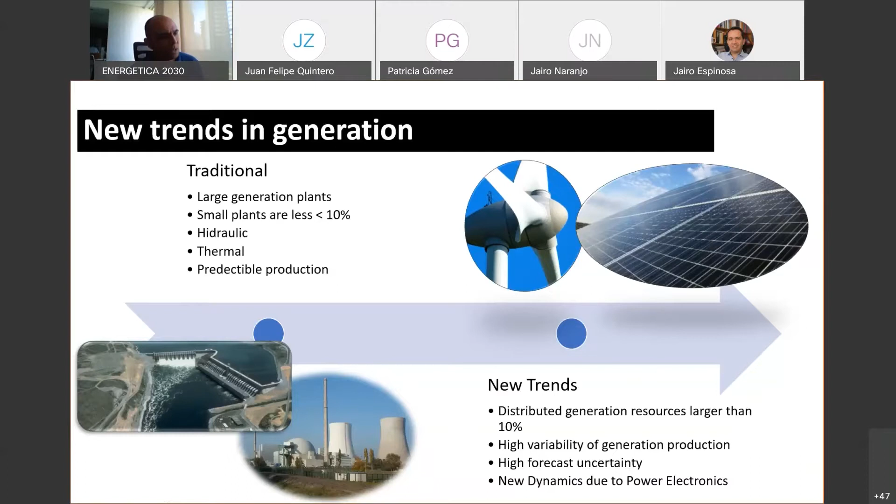So we have high variability in generation production. Now the distributed generation is becoming larger and larger. So we have a lot of distributed resources in the power system. So it makes new dynamics that we have to take care of. There is a really high forecast uncertainty. So it's really difficult to forecast long term the generation that we will have. So these challenges make us change a lot.

So we are focusing on Colombia right now, and Colombia is a power system that has an energy matrix that is really hydraulic. More than 60% is hydraulic, and then it's thermal. But now we're becoming really fast to get new types of generation, especially solar and eolic. And there are some projects, and the idea is to include the projects in 2, 3, 4 or 5 years. We'll have up to 7,000 megawatts. So it's more like 30% of our current capacity.

And all the technology is going to be placed mainly in the north part of Colombia. And it takes new ways to analyze what the power system is right now. So there are some other countries in Europe and the United States that have faced this challenge before. However, we are trying to be in the same way, and we are developing with these partners a lot of the new technology that we need to control this type of systems.

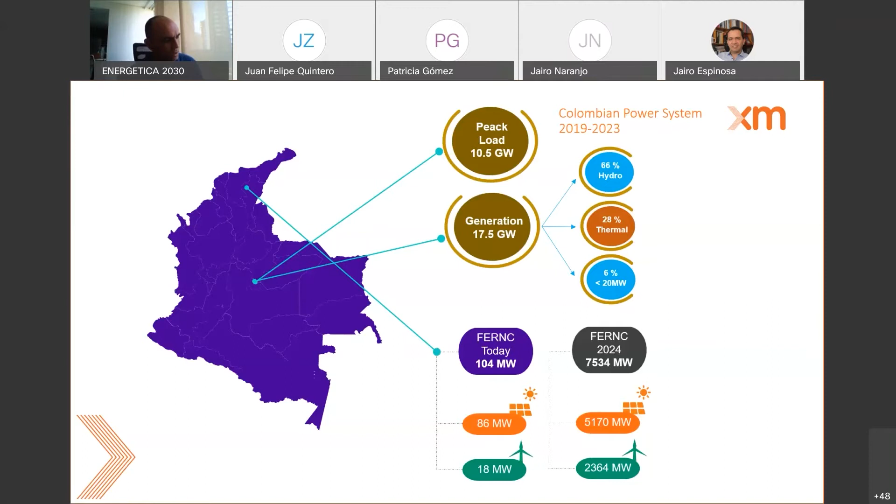Another thing that we are facing right now is that we have a lot of auto generation. So in Colombia, auto generation is increasing, and around the world, especially in countries like the United States and California, it's also mandatory for new houses to have auto generation. So it's becoming more and more popular, and it makes a new challenge in the operation of the power system.

So the other thing is that the electrification of transportation is becoming more popular. For example, Colombia is one of the countries that has more electric cars. In Latin America it is a country that is increasing the production of...

Sorry, there is someone with the microphone. Okay.

So the sales in Colombia are getting bigger. We are facing new challenges in the infrastructure and also in the control of this technology, because it will be really hard to control the charging and try to understand what is happening with the demand. So we have more active demand in our power system and it is creating new challenges in the control room.

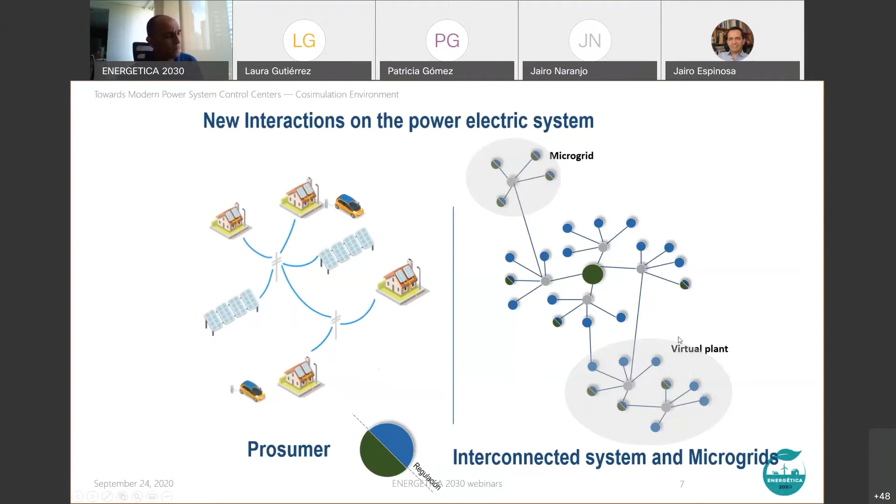We can have new actors like a microgrid, a simple microgrid that has several prosumers, but also something that we are calling a virtual plant. It's common that you aggregate several microgrids and then you try to dispatch these microgrids centralized, or probably they can be separated also. And then we have our traditional power system. So they are facing new things in this part. For example, I want to show you an example of what is happening that we have to take care of when we are forecasting our demand and our generation production.

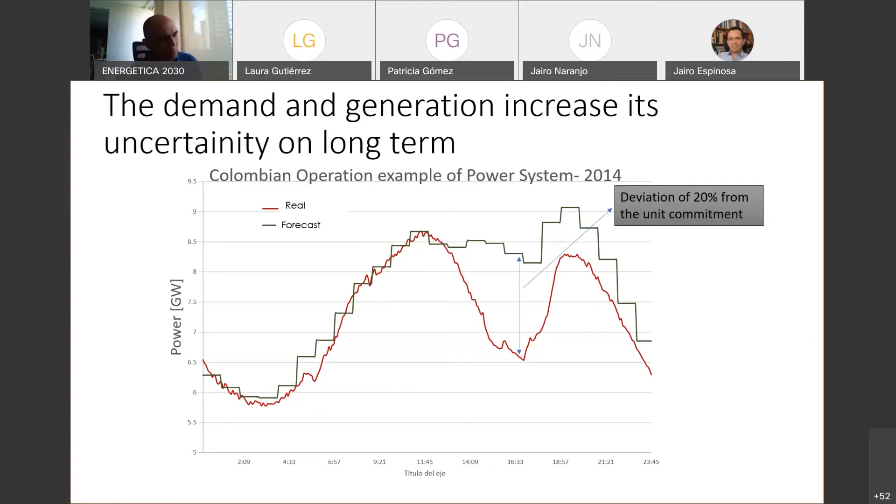For example, in 2014, our independent system operator forecast the demand of the day. It was a particular day, and the demand just had a different behavior that day. It was really interesting because this behavior was due to social activities. This social activity in Colombia was because we were in the World Cup, facing the match Colombia versus Uruguay, and the demand went down up to 20%.

So these types of things make us think that we have to take care about different conditions, not only the electric variables, but also other conditions. For example, we have to take more concern about the traffic, because now we are having a lot of demand coming from electric cars. We need to face the new social conditions and disease. Today we have COVID, and it brings new things to forecast the demand. So it's something that we have to take care of. We have to combine all these things to make a control system more reliable and efficient.

So what is happening right now is that our power system is becoming more nervous. Our balance between demand and generation is changing really fast. We are facing really fast movements that we have to take care of, and our control system and our supervision system must be prepared for these conditions. We have to continuously see what we can do.

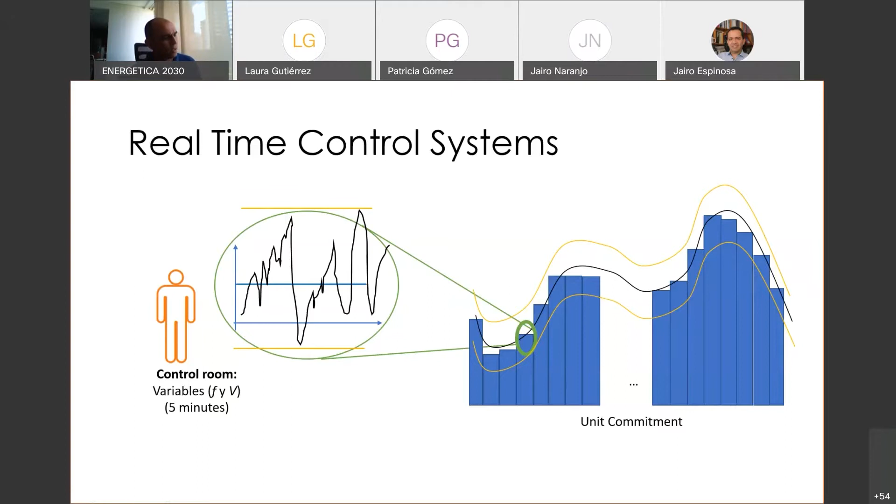So in this case, we start with our power systems. Since it's a critical one, we need more reliability, strength, redundancy, response and restoration, and all these we can group in a term called resilience. So our system has to have more of this feature, and that's why we are trying to study this part.

So Energetica has one of these projects called Power System Supervision, Operation, Protection, considering the high penetration of renewable energies. We want to develop technology that makes us prepared for this challenge that is coming really fast. So every day we are trying to become more active in this.

Involved in this particular project are Universidad Nacional with our real-time lab, XM, the independent system operator, with its lab of innovation and co-simulation called LinnoX. There is also Internexa, a communication company that also has a cloud service that we are trying to use, and Universidad Pontificia Bolivariana with its power system group.

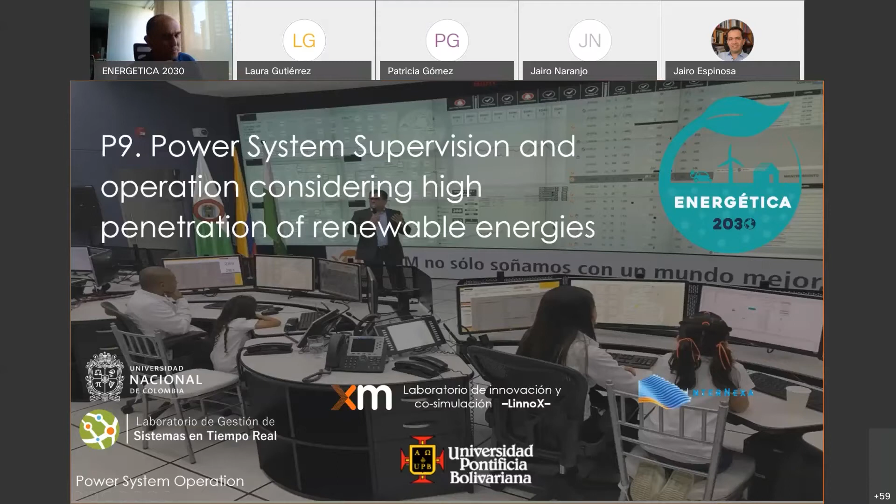This project within Energetica is also supported by some international allies. If you have been in the previous webinars, some of them have been participating here, especially the University of Aachen and the Institute of Jülich. We also have interaction with the Catholic University of Leuven, TU Delft, and the Technical University of Eindhoven. We have in this project more or less 30 to 40 researchers, and we have divided this into several objectives. I'm gonna show you a little bit.

Sorry, this is in Spanish, but we have an objective related with the forecast of generation and demand for real-time applications. We have the unit commitment and real-time dispatch of our plants. Some objectives are related with supervision, how we can supervise and control this system with these new dynamics, and some protection schemes that are needed. All these objectives are within a framework of a co-simulation lab and a strategy to make new ways to supervise the power systems.

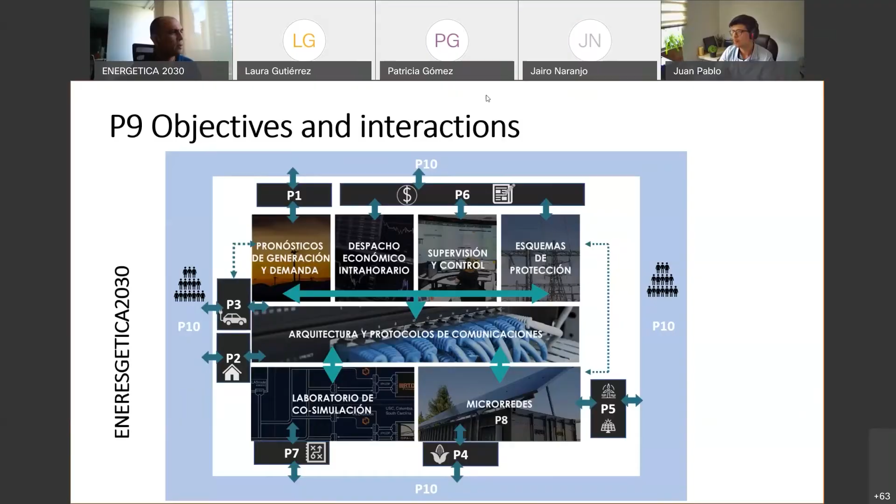One second. Set this up. So I guess you can see now on the screen. That's correct? Yes, Juan Pablo, you can. Yes. All right. That's perfect.

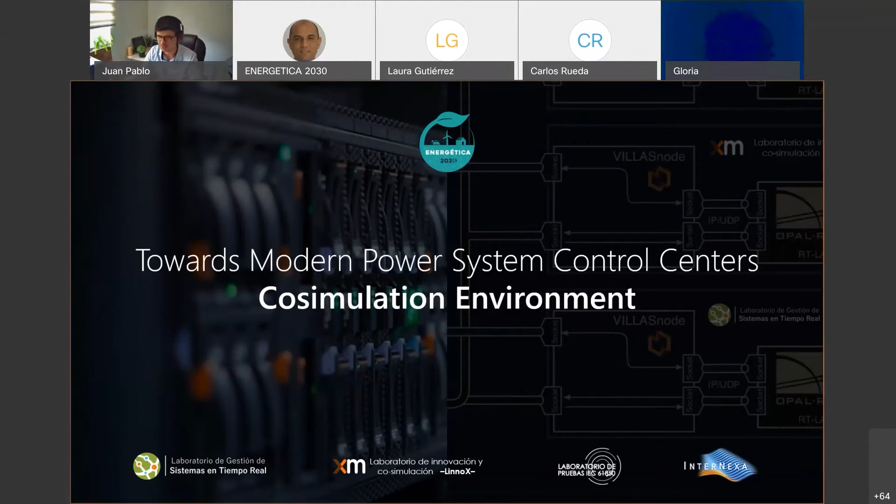Well, as I was saying, my name is Juan Pablo Noreña, and I want to talk about how co-simulation environments, and more specifically, our co-simulation environment here in Energetica 2030, is helping us to create a roadmap towards modern power system control centers. So let's say that modern energy systems are expected to be multimodal, as Professor Ernesto said, and incorporate a diversified matrix of sources to achieve the maximum usage of every form of green energy available.

That's the main goal. It's a vision that the distributed nature of these new resources and the high penetration of inverter-based generation require faster, more reactive control and protection of our systems. Other important aspects are the inclusion of storage capacity as utility scale batteries and vehicle-to-grid approaches that introduce very interesting dynamics to the system.

The demand response, the participation of load in energy management through microgrids, virtual power plants, and other kinds of aggregation of these prosumers. Also, we have an increasing market competition-driven behavior in our system that introduces other dynamics involving very human dynamics around markets in energy systems. So because of these characteristics, modern energy systems can be classified as complex. And naturally, concerns about emerging behaviors might arise.

So the monitoring and control of modern energy systems is expected to be characterized by a distribution of these functionalities, these functions that must ensure the correct orchestration of the system. So to ensure this optimal coordination, we will need a significant use of communication media and computational capacity. This is due to the increasing number of controllable devices that we will have in our system.

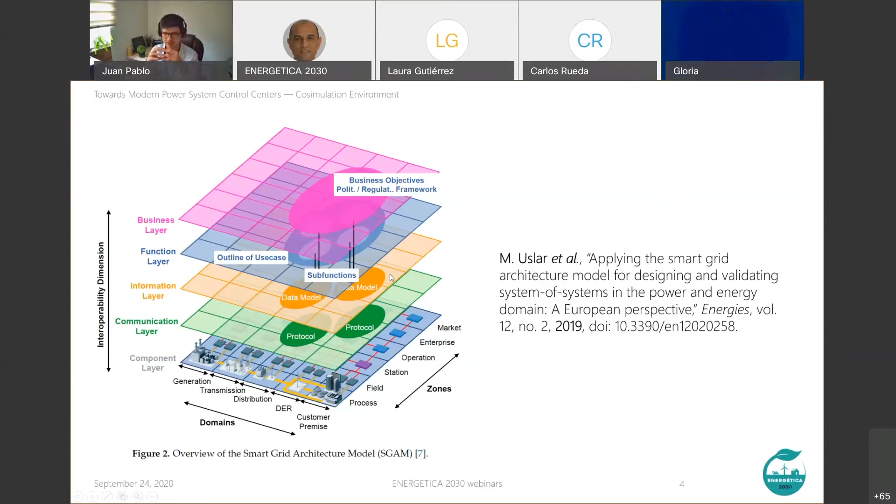So a modern control system, a modern control center, is software-based. It is based on software modules that must ensure the interoperability, the security, reliability, cybersecurity of the system of systems, its functionalities, integration, and performance assessment. For the sake of the presentation, we will call these software modules power apps, which must take this role to ensure an optimal coordination of the system.

These power apps may run on-premise, as was normally done in the past, but it's also the moment to start adopting some new solution architectures, such as solutions in the cloud or even in the edge. This interoperability is super interesting. As you see here, we have to ensure the interoperability of several domains: the markets domain, the ICT domain, the bulk power system domain, and these new participants such as microgrids and virtual power plants.

For example, in Colombia, we're very interested in this topic. For example, the group CIGRE C216 proposed that we have to face some of these challenges soon to ensure an optimal transition to future power systems. So here we have the most common applications, or power apps, that we have in a modern control system. The blue ones might be the most popular, as you can easily recognize some of them. Here we have the state estimator, the reserve monitoring, load forecasting, etc.

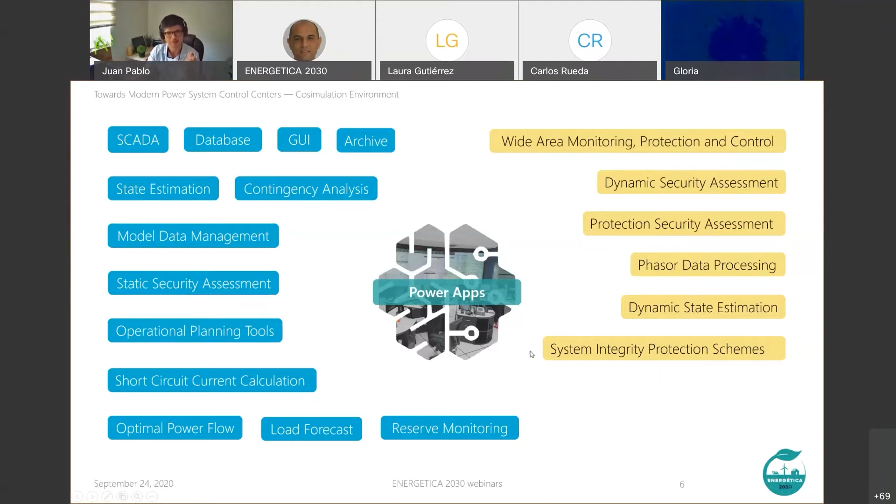So here we grouped some of these applications into 8 groups. I would like to highlight the energy management system that have several power apps that must ensure the correct operation of the system in the steady and dynamic states.

But also we have some more modern applications such as digital twinning. Digital twins are software-based abstractions of complex physical systems or objects, which are connected via communication link to the real object or system through a continuous data flow from the real world.

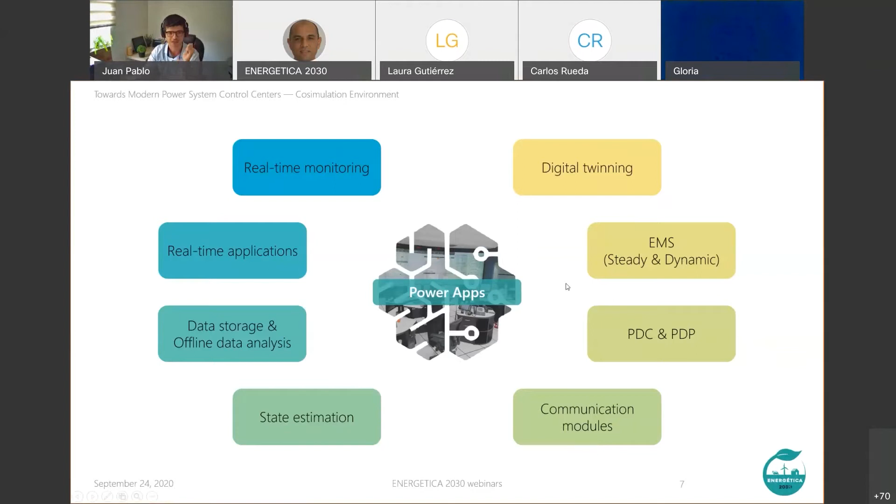The digital twin makes it possible to reflect the physical conditions in real time by linking the physical and digital domain, the physical and digital world, and provide dense analytics for the system it mirrors. It's a very interesting application that is going to be in the core of the modern power system control centers.

Then, as Professor Ernesto said, ICT, information communication technology, has a very important role now. Accurate and responsive power systems must incorporate high demands of ICT. Real-time monitoring and control applications will depend on high end-to-end performance and the scalability of this technology to guarantee the correct working of the applications.

So robust middleware services that are able to operate with variable resources and multiple source sensor data will be indispensable for advanced power apps. Then the increasing complexity of power systems led to the development of new approaches in power system communications. Legacy but still widely used SCADA protocols such as IEC 104 or DNP3 for TCP/IP communications between the control center and the substations or other distributed elements are supplemented by new data modeling approaches.

I would like to name some of them. Maybe most of you will recognize the IEEE C37.118 protocol, the synchrophasor protocol, that enables the growing number of applications, the wide area monitoring, protection, and control applications considering PMU technology.

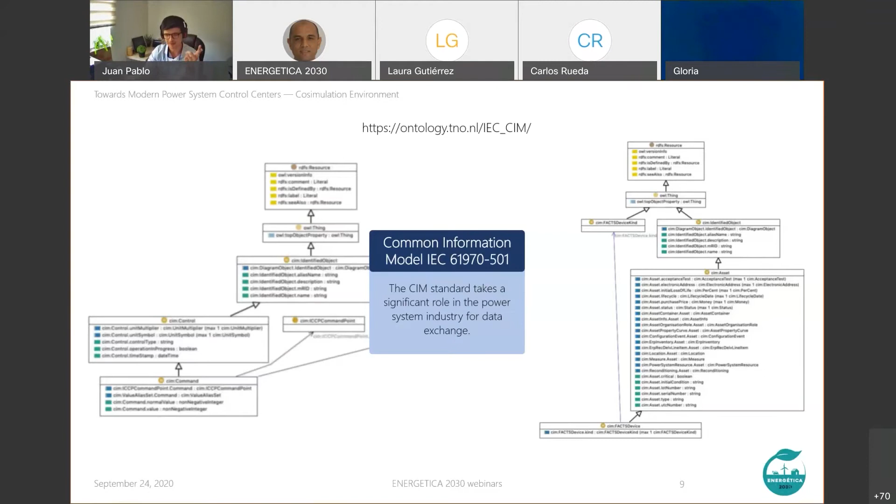The CIM is extended regularly to adapt to new factors such as the market models, the communication elements, graphic models, and new grid components. And the harmonization approach between this CIM standard and the IEC 61850 protocol is also an advantage. Well, that's the overview.

What now? So during the past few years, planning, designing, and implementing these applications, these power apps, and other types of applications in modern power systems have experienced a paradigm shift. How is that? In the sense of how these approaches are tested and validated to ensure a harmonized transition. So that's the question. How can we ensure a harmonized transition to accomplish this integration and this transition to these modern power systems?

So we have been following the work that some European projects have done in the recent few years. For example, RESERVE and ERIGrid, both of them have proposed that we have to holistically address this process of validation rather than using the traditional component level approach. This is becoming more relevant since the developers or the researchers of these applications need to have a comprehensive vision of their applications before they get implemented in the real power system or this system of systems. So in Energetica, we are trying to follow this path that these two projects have set.

And they both had proposed some methods. Reserve had proposed the interoperability testing approach, and ERIGrid had proposed the holistic description method that, in the words of the authors, facilitates the conception, the construction, and reproduction of intricate experimental designs in domains of cyber-physical energy systems.

As you see here, they interconnect several remote labs using this framework called VILLAS Node that is pretty important for us in Energetica because it's a tool that we also use. We also are trying to implement our very own co-simulation laboratory, also with distributed resources, with distributed infrastructure, geographically distributed.

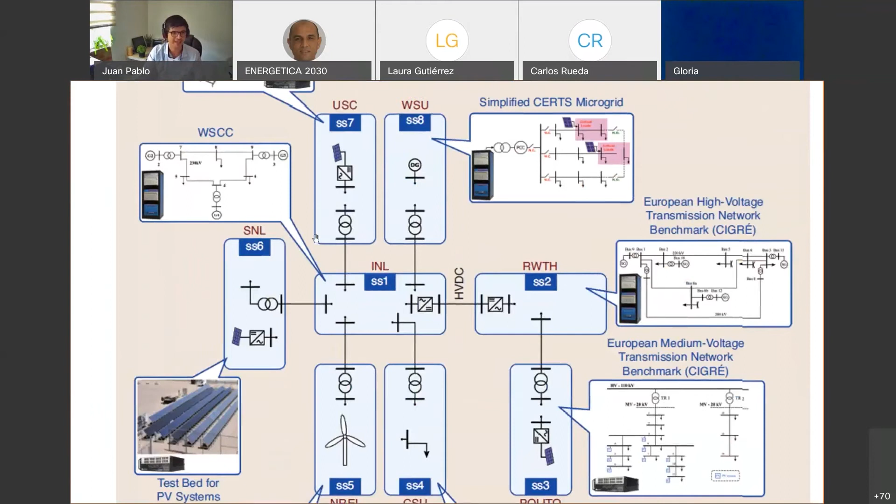So in this work, they virtually interconnect several laboratories around the world, some of them in the United States, some of them in Germany, and others in Italy. And well, this is a pretty interesting paper that we follow as inspiration for what we will show at the end of this presentation.

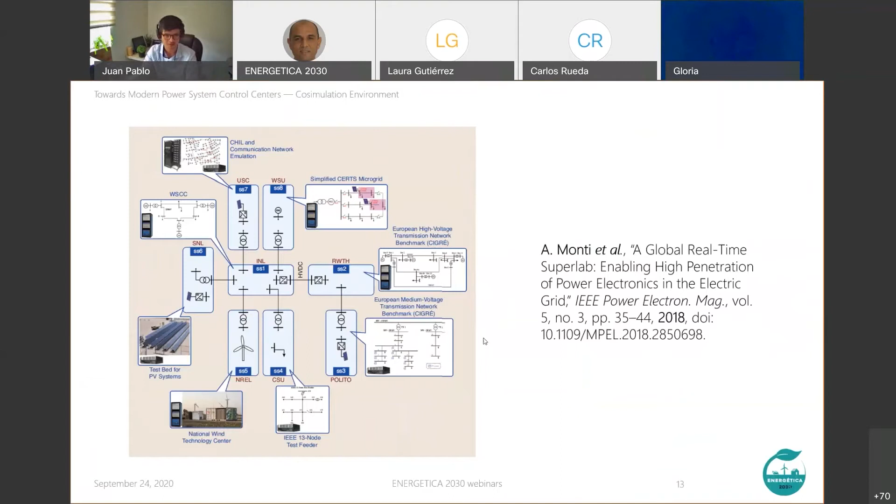Also, if you had the opportunity to attend the presentation of Professor Andrea Benigni, he talked about how real-time simulation enables or benefits the testing of modern energy systems. Here is an architecture that they propose in the paper. They show in the paper how they close a big loop that has power in the loop elements, real-time simulation elements, physical IEDs, communication, ICT elements, protection elements, etc.

They also have a software-based control room that includes a SCADA and phasor data concentrator. But very interesting is that they include a cloud architecture or a cloud solution that runs several power apps that close this loop among these applications.

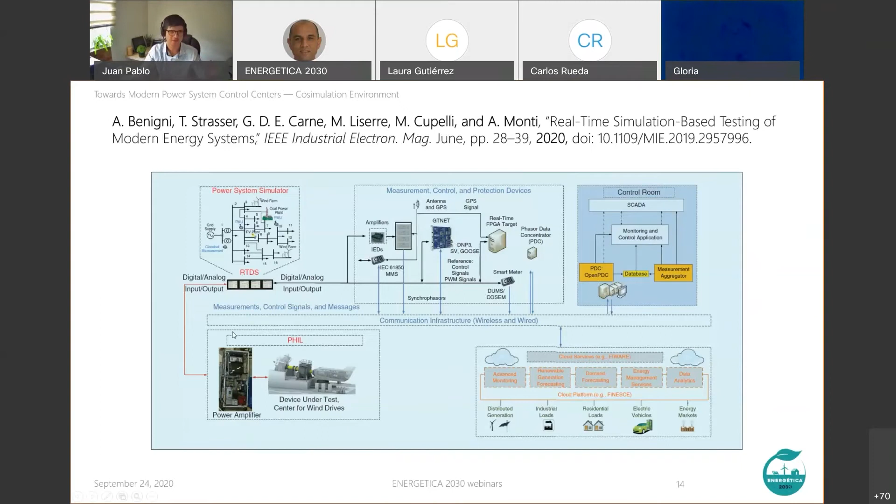So as Professor Ernesto said, here in Energetica, we are also developing several applications. We have several teammates working in dispatch, protection schemes, control algorithms, forecast algorithms, microgrids. Real microgrids are being employed in the project. So the Cosimulation Laboratory wants to provide this environment to the scientific ecosystem to make them available to do these holistic validations of their applications. So for that, we had to develop our very own high-level architecture of a co-simulation laboratory.

Here, this is our architecture. Sorry, I need to zoom in this part. We are virtually interconnecting 3 laboratories for that. Let's say that 2 of them are located in the same university and will be coupled by a dedicated fiber channel, so they may seem as one laboratory. But we have 3 different locations.

One of them is the Universidad Nacional de Colombia, with the Laboratorio de Gestión de Sistemas de Tiempo Real and the Laboratorio IEC 61850. We have the laboratory in XM, the Colombian National System Operator, and we have the last one in the Universidad Pontificia Bolivariana at the Renewable Energy Laboratory.

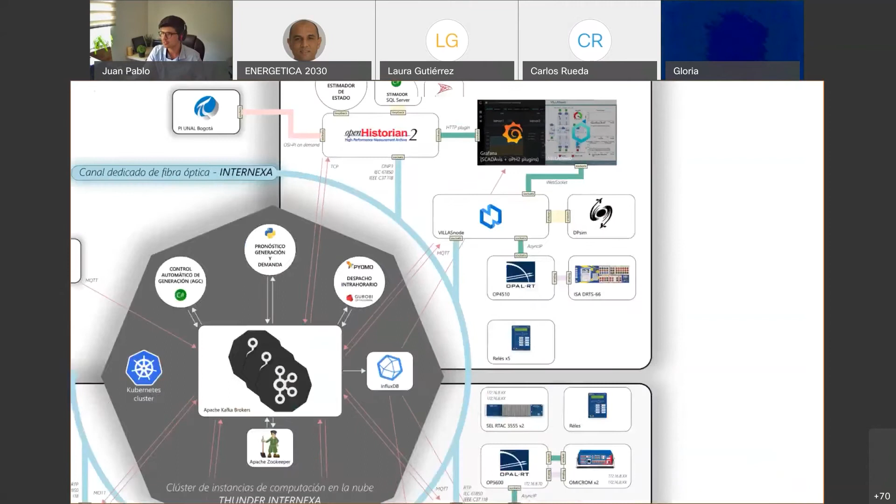So what's the idea of this? This virtual intercommunication is possible thanks to the dedicated fiber channel that Internexa has provided us, that interconnects the 3 laboratories. And what we are trying to do is, as I said, using tools such as VILLAS Node, virtually interconnect our real-time simulators that we have.

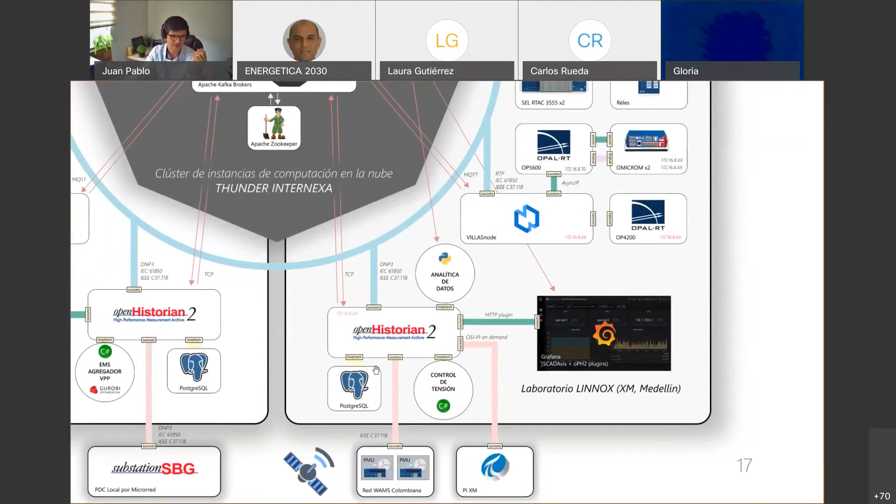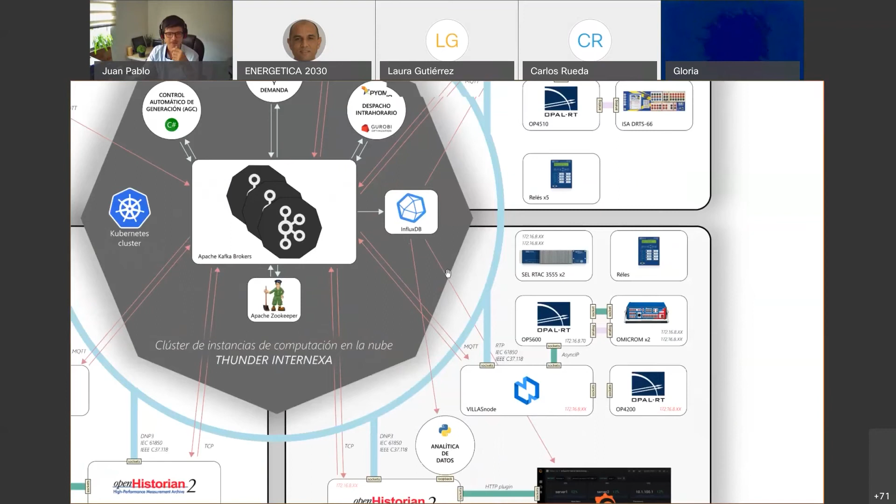Also implement some non-commercial real-time simulators, open source simulators like DPsim, and also incorporate other tools that we envision could be pretty useful in order to develop this very complete environment for testing these applications. The openHistorian 2, as a PDC, as having SCADA functions, and so on. And that's it. Well, we also are trying to start testing these digital twinning applications.

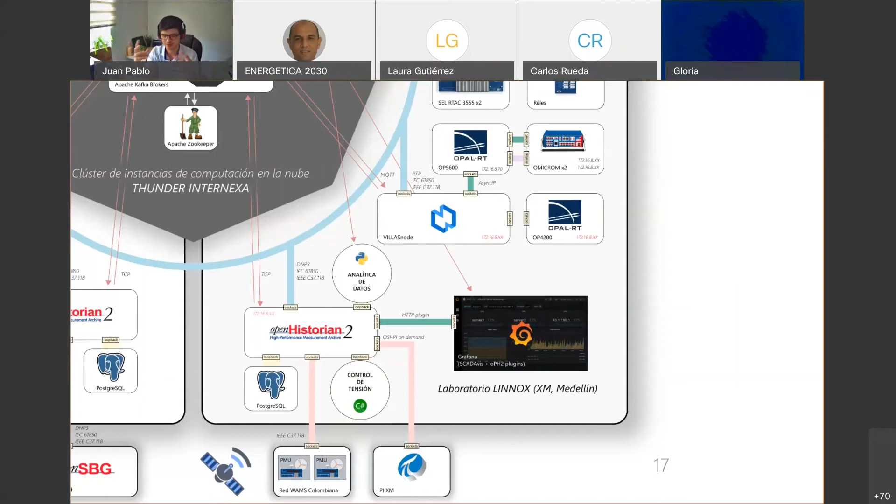So the idea is that we want to interact with the real world, with the real measurements of the real world. So we are having a connection with the WAMS network here in Colombia. As Mauricio Hernandez from XM said in a previous webinar, XM has the iSAAC net that has this WAMS network with several PMUs around the country, most of them located in the north of the country because that is where the distributed generation is going to be located. So we want to use that data to start implementing these digital twin applications.

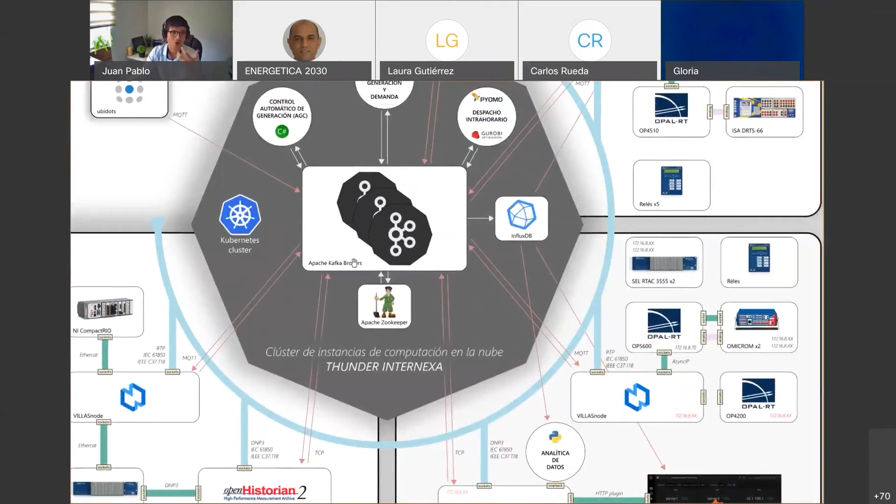Also, as Ernesto said, we have really big interests in going and testing cloud solutions for power systems. So Internexa is also very essential in this part because it's trying to provide us a cluster of a private cloud where we are trying to adopt these good practices that we have seen in other industries, such as Kubernetes clusters and containerization of applications to make them scalable and easy to deploy.

And we want to test the applications that our teammates in Energetica are developing, as the dispatch, the intra-hour dispatch, the very novel automatic generation control algorithms, and so on.

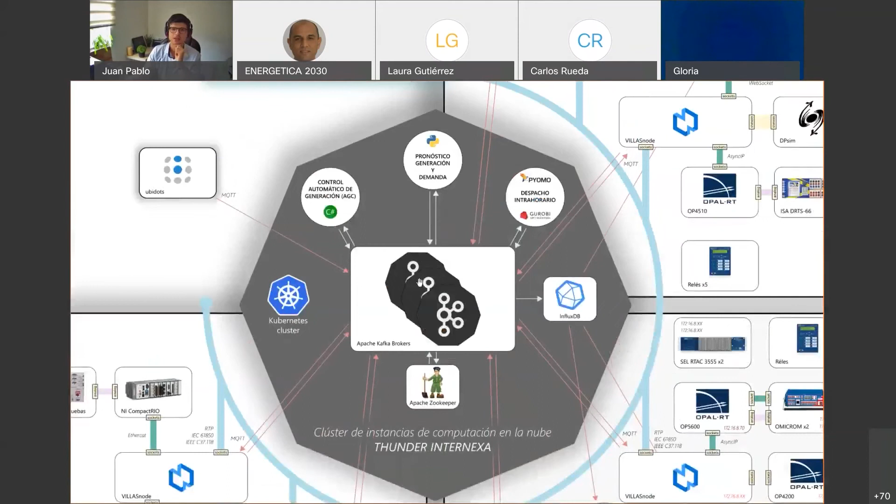So in order to make this a cyber-physical environment, we are also trying to make the power domain and the ICT domain pretty close and trying to represent a reality that has both domains pretty close. So we are doing some emulation of the network and traffic of communications using Linux NetEm and QDisc to make this environment closer to reality.

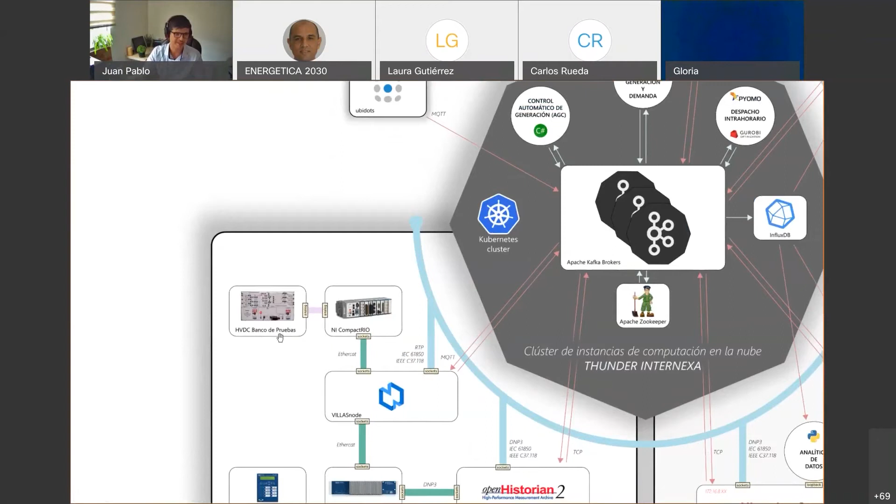As we said, it's not strong now, but we are also trying to test power-in-the-loop elements. We are starting with this HVDC test bank in the UP, but we are now thinking of acquiring some other elements to let us perform bigger and more complex power-in-the-loop scenarios of applications.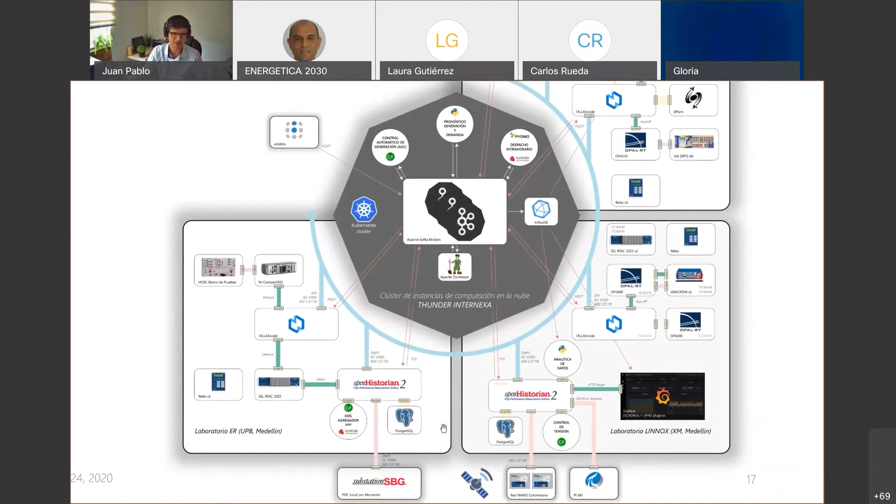Also, it's very important that we're very interested in the integration of virtual power plants and aggregator EMS that hierarchically control several microgrids. In Energetica, we have 5 microgrids that are being deployed around the country. Some of them here in Medellin, some of them in Sucre, and so on.

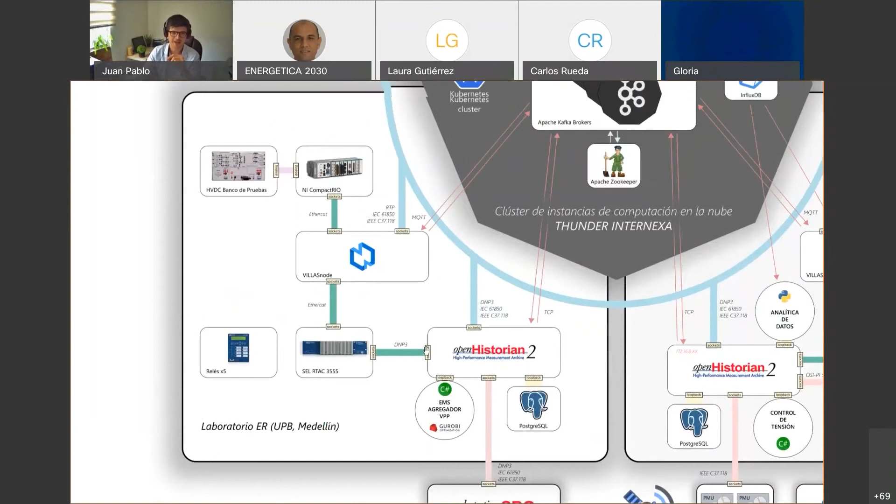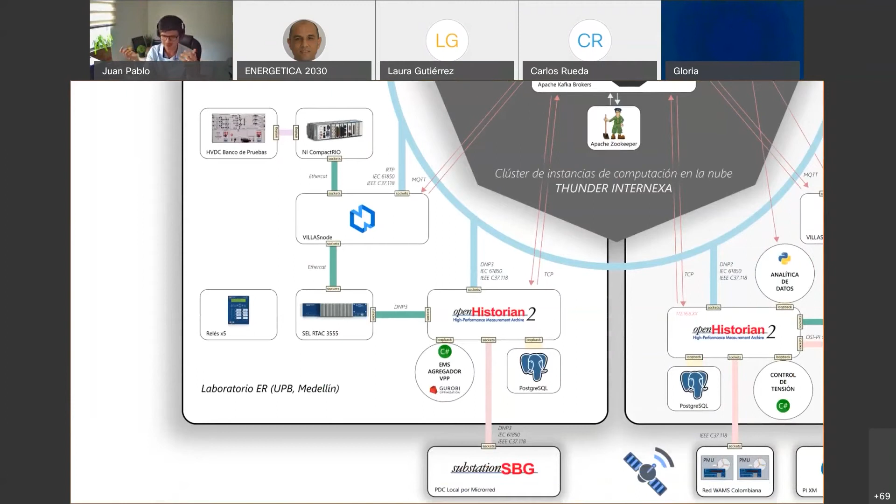And the idea is to make this also a close interaction with these microgrids, because they're like a place to experiment with these virtual power plants and the interaction between the virtual power plants and the orchestrator of the system of systems, this advanced power control center. So that's it. That's the architecture that we are proposing.

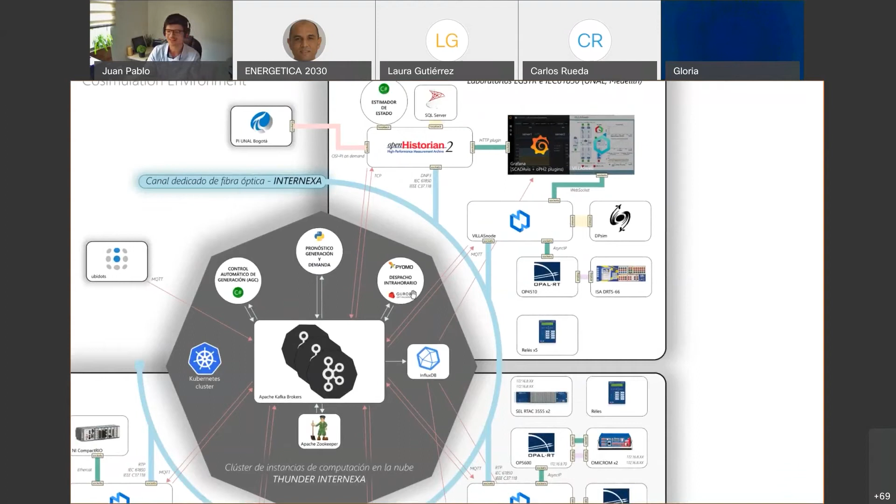We're trying to work pretty close with the developers of some of these applications. For example, as I said, the team of Professor Antonello Monti, Steffen Vogel, and Markus Mirz are the developers of these applications that we are also trying to prove in the cloud. We are interested in having real-time simulation in the cloud. We have also in the past worked closely with the developers of Open Historian, Ritchie Carroll, and so on.

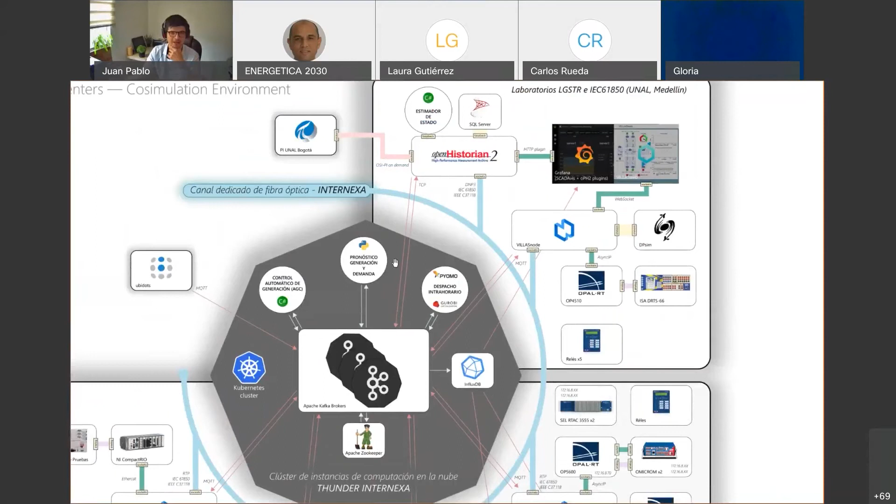So that's the main goal for us, having a really interesting environment not only for the scientific ecosystem of Energetica. The idea is in the future to make this environment available as a service for the sector in Colombia, and if possible, sometime make the connection with the global RT lab, this interesting and very huge infrastructure, and also be part of co-simulation as a service for the world, for the huge and large testing that these European projects or these United States projects are working on.

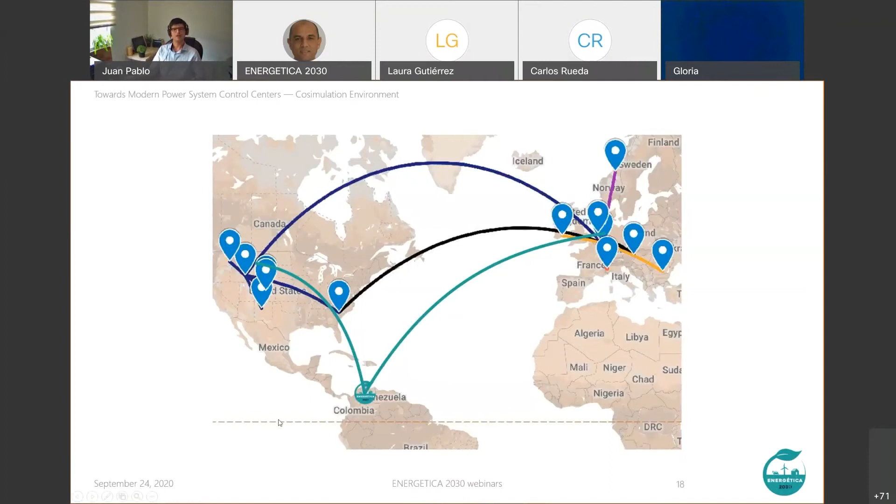So that's what I wanted to present, how the co-simulation environment will enable this reality that we are dreaming of, that we want to make possible for Colombia particularly, but we're learning a lot from what other countries and other people have done around the world.